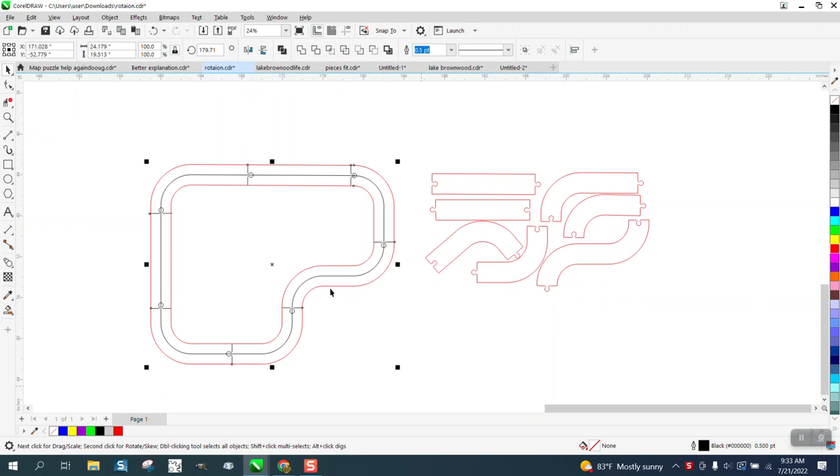But I thought of how you could save wood when you make this. I've turned this 24 by 19 and a half, by over 24 to 22 by 11.6 in wood. It doesn't really matter, this would be a nice scrap piece to use.

I thought let's just draw a really simple track. The other day I used holding down the control button to make perpendicular design, and then we're just going to come straight down, making a really simple track. We don't have to cut this, but I just get out of habit.

Because we're going to take the Smart Fill tool and fill that in. I also said the other day it didn't really matter what size you started with. Well, right here, you want a 24-inch track, you want this to be 22 inches.

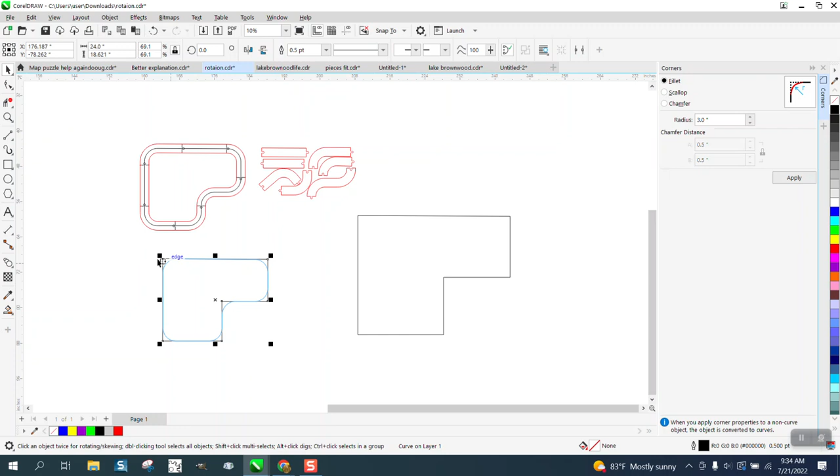Because then we're going to go to Windows, Dockers, Corners, and if you can see, it's already done our corners, just hit apply. There's our new racetrack. Then we can go up to Object or Effects, Contour to the outside 1 inch.

Go up here to Object, break Contour apart, grab the interior contour, go inside, and I'm also using rounded corners right here. So we've got that done. It looks pretty, that's a little easy, simple track.

But I thought I'd go ahead and show you how to break it apart. So we need to select it all, go up to Object, and break the contour of the 3 objects apart. I've got my nudge factor set on 25, so we're going to nudge that out of the way.

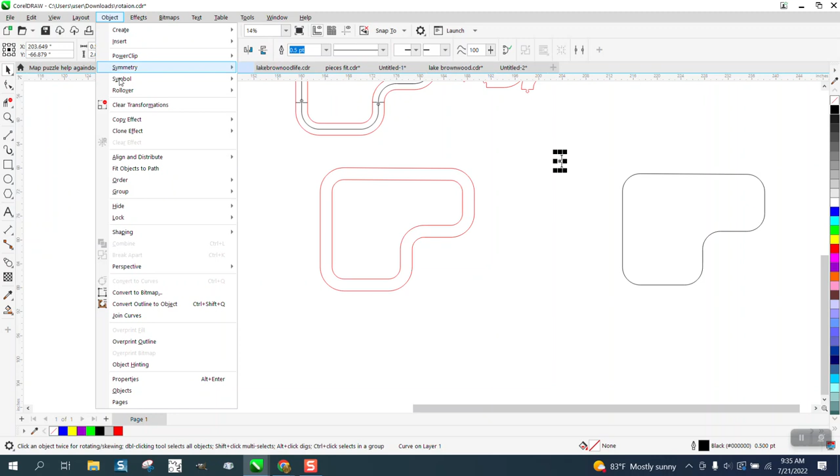Now, just real quickly, I'm going to go ahead and put in the puzzle pieces. We're going to use Fit Objects to Path. Let's do 6 of them. So you grab your object first, hold down the shift.

Let me get this out of the way a little bit, let me zoom in. So you've got your object, select it first, hold down the shift, select your path, and hit OK. I don't like where it puts some of those, so let's make it 7.

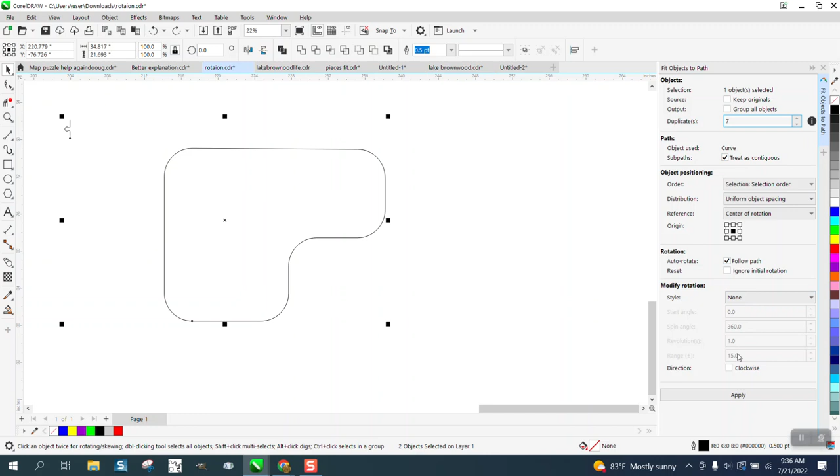No, you know what, let's make it 5. Or we could go with the 6 and just have to move some of those around. So shift select the path down and hit apply.

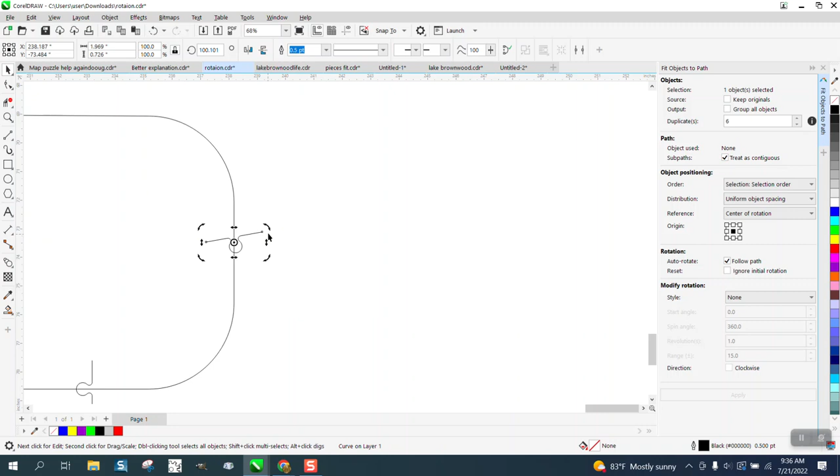So we've got 2 that are just kind of off a little bit. It's not that big a deal because I do like Object to Path, because it doesn't move or you don't have to break anything apart. You could bring in indexing lines to get this perpendicular, but it's a puzzle and those 2 pieces are going to be generic to themselves.

And you can see I'm off. Let me turn on my guidelines and you can get them dead on by double clicking on your X there, and double click till you get the rotation, then move the rotation there.

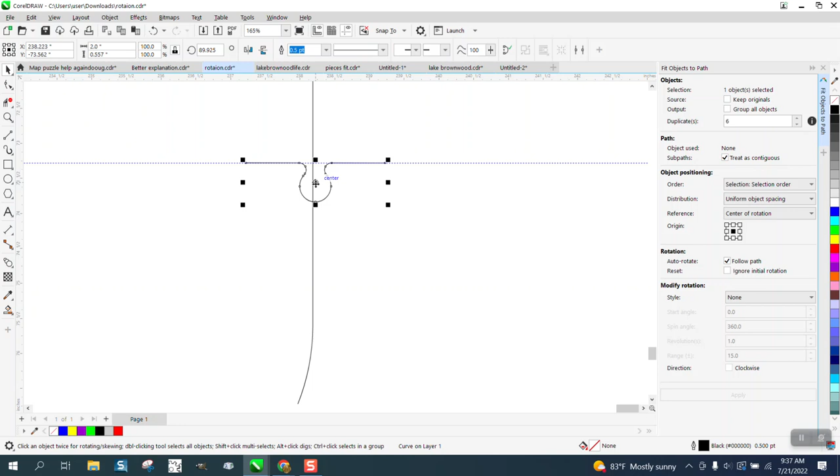And then if you go right here, you can get it snapped too. But you're off on the center a little bit, so then again, it's a puzzle, so we need to move that over just a hair.

One other one real quick. All the rest of them look pretty good. Let's just move this guy up. This is why I like this tool.

This time I'm not going to bring in the indexing line. Even if it's off left or right, it doesn't really matter, it's a puzzle. But we'll go ahead and have it snapped to there. And I can see I'm a little bit off.

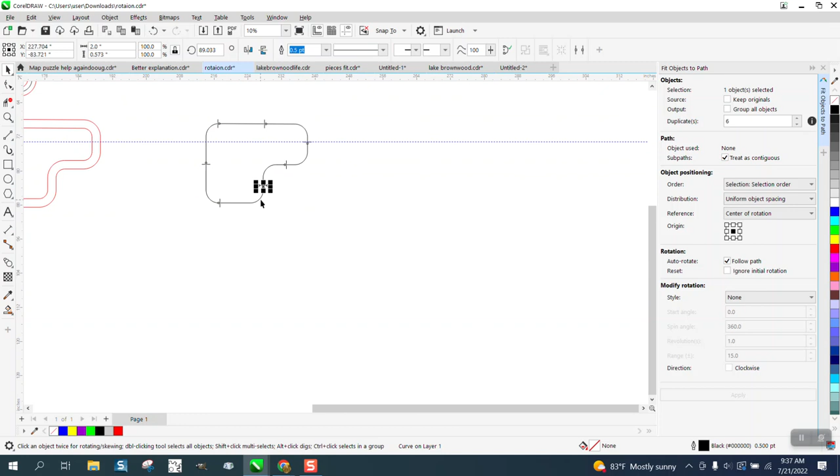But then we can take our black track and move it over, take all of our parts and nudge it over to our part. Now, if we don't have any leaks, and we're going to check the 2 we moved, doesn't look like we have a leak. Think we might be good to go.

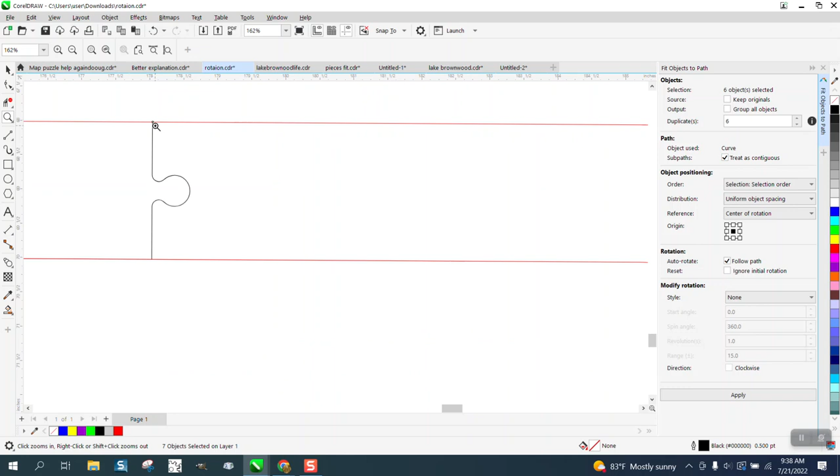So now I'm going to take my Smart Fill tool, and we do have a leak. So it's got to be leaking right there. There it is right there, even though that's not one I moved.

Now this time I don't even have to cut that off, I can make it as long as I want. Take the Smart Fill tool and fill that in, nudge it. Let me change my nudge factor to something bigger.

Yeah, we're at 26, and you could resize it right now if you wanted. With nothing selected, let's make our nudge factor 28. So take the Smart Fill tool, nudge that over.

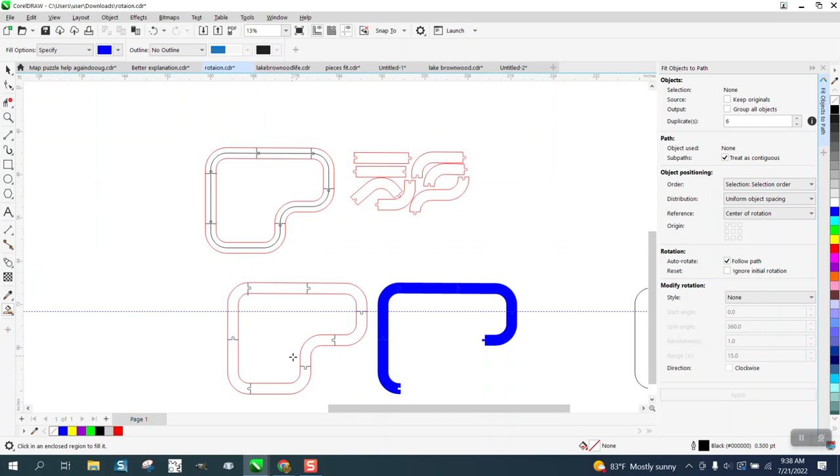Whoops, got another leak, so delete that last one. Our leak is that other one we moved. Sometimes it looks like it's on the line, but it might not be.

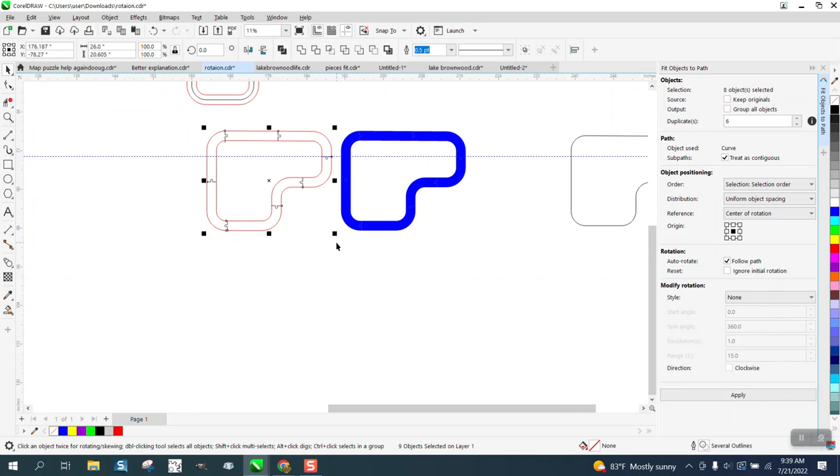And then Smart Fill tool, that one, and that one. So now you can actually delete that. I'm just going to nudge it down, but if we left click, right click on red, make sure it's a hairline for cutting.

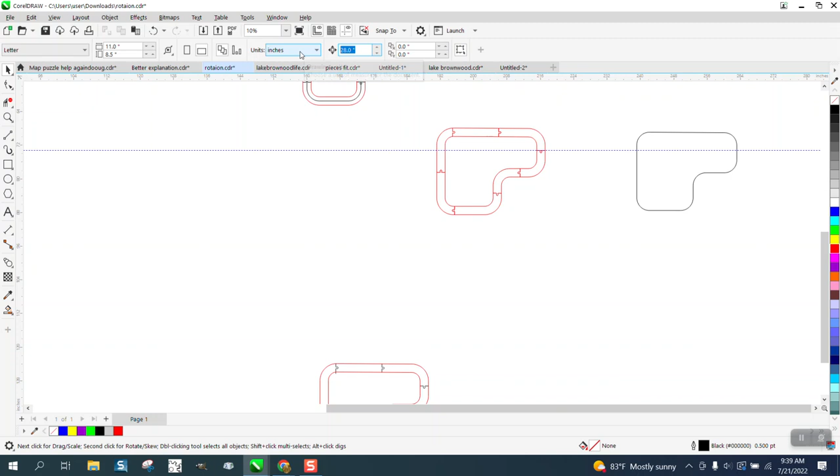Here's your puzzle pieces, so let's move this back. Whoops, I did change my nudge factor, let's put it back to 25. I think I had it on when I nudged this. Always kind of remember what your, well, regardless.

This is the track, and if you look, it's 26 by 20 and a half. But now these pieces are individual. So we could take this piece and put it there. I don't have too many long ones this time.

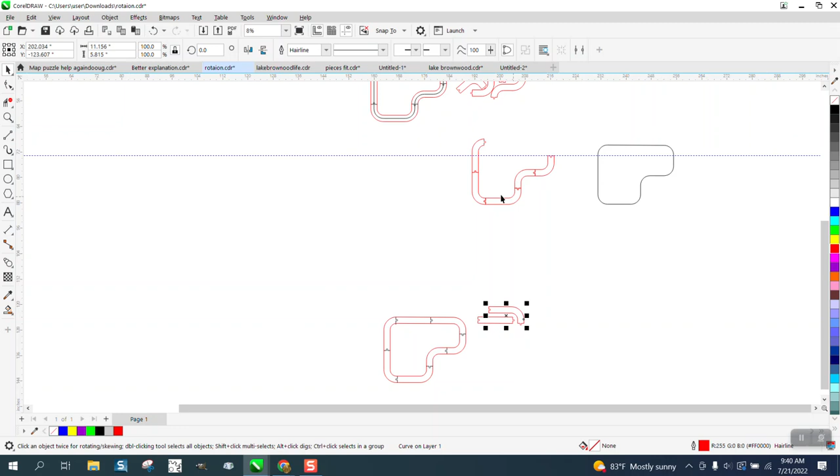But you see what I'm doing? I'm moving pieces around where they're going to kind of fit snugly. You could do a lot, it's almost like nesting. I would not mirror it, I would rotate it, because if you mirrored it and actually cut one upside down, it wouldn't be the same.

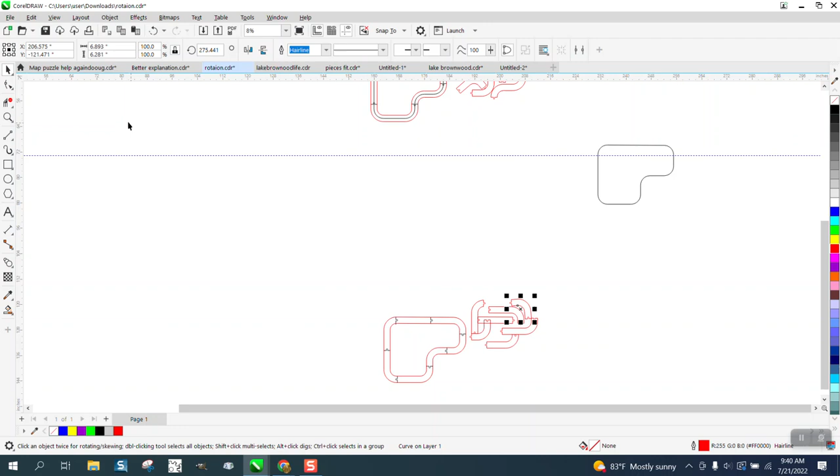And then you could bring in part, and I'm not spending a lot of time on this. You could actually just manually rotate it and put that guy right in there. Look at the size, and just think if you took your time and did a little bit better job than I'm doing, there's a lot you could do with this.

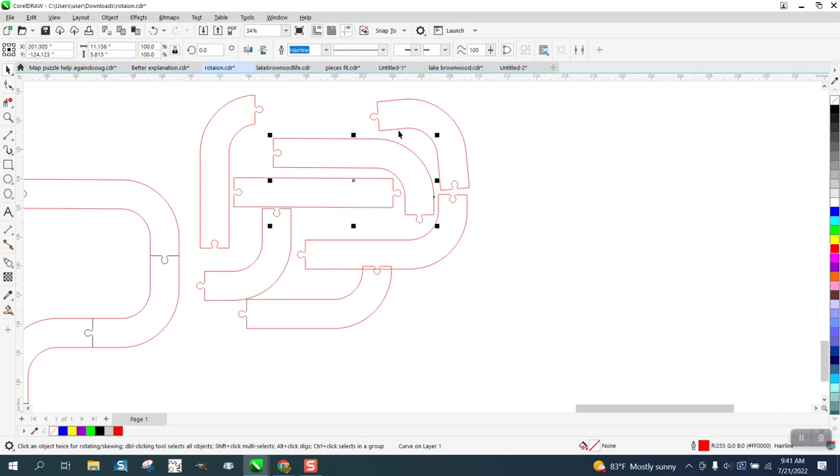I don't know, you just play around, but just make sure they're not touching. Now, I didn't do a very good job on this one. If you put another couple of joints, you could really save you some time or save you some space.